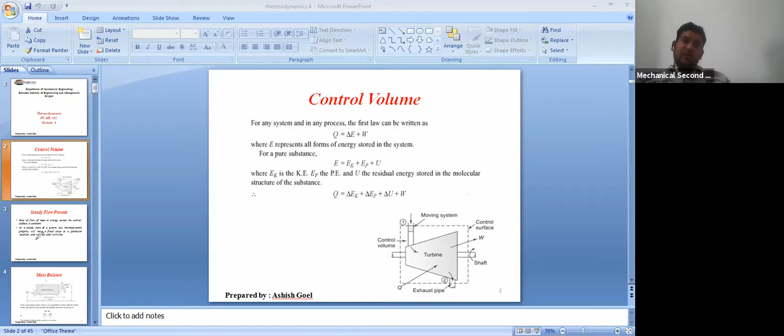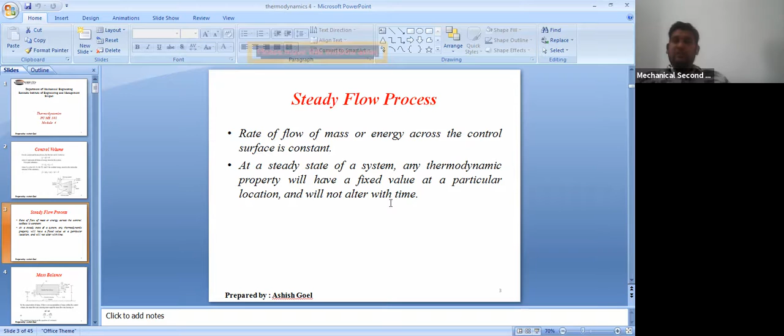But in steady flow, everything should be constant. That is, everything should be same. Input and output is same. At a steady state of a system, any thermodynamic property will have a fixed value at a particular location and will not alter with time. All the things will have a particular value.

Okay, now for a steady flow process, mass balance is compulsory. How? You can see this is, suppose, a steady flow device. All the devices that we consider for this thermodynamic study, that we use in our day-to-day life, such as nozzle, diffuser, etc., they all come under the category of steady flow device. So for example, here suppose we have a steady flow device.

Now you can see this dotted line is nothing but the control surface. This is the inlet pipe, through which a flow is coming inside the system. For example, if you take any nozzle, in a nozzle what happens? The fluid enters the nozzle with less speed, and when it goes out of the nozzle, it has high speed. It is the nature of the nozzle. It increases the speed of the fluid.

So in the similar manner, suppose we have a steady flow device, whatever the device it may be. So this one is the inlet, and this 2 is the outlet. That is, from pipe 2 the fluid is coming out of this control surface. Okay, now suppose this first pipe

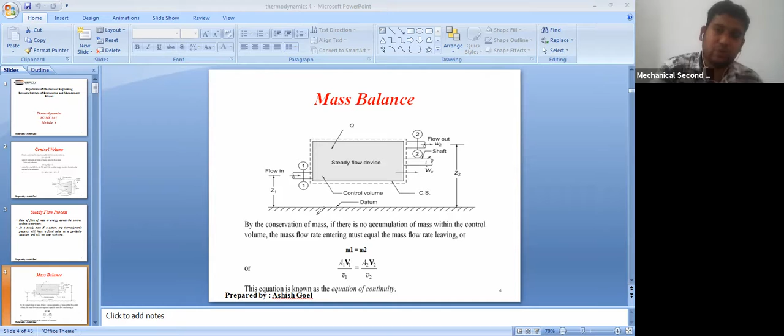So what is the continuity equation? It is nothing but the mass balance. That is, the mass inlet should be equal to the mass outlet. Small v is the specific volume, and capital V is the velocity.

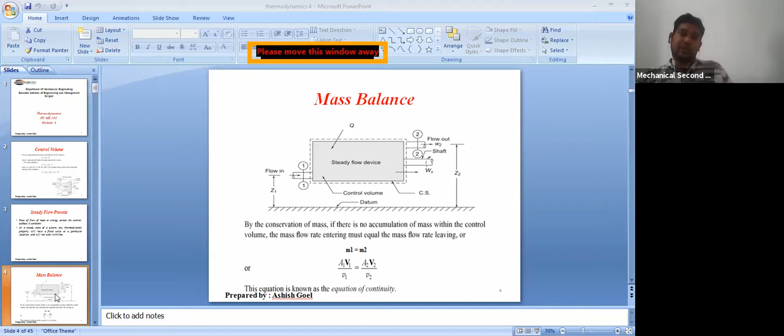So this is the continuity equation. Remember this formula: A1 V1 by v1 equal to A2 V2 by v2. Okay. Now let us discuss energy balance. Same system we have, same datum, same steady flow device. Okay, same shaft. This is the entry point, this is the exit point.

So what is the energy balance? Energy is also not accumulated inside the system; whatever energy is coming in should be equal to what is going out. In the meanwhile, you can understand that whenever a device or system is there, when some energy is coming in, some energy is going out, and it is able to perform some work, then definitely there would be heat transfer.

Because if the device is not isolated, not insulated, then definitely heat transfer can also happen, from the system to surrounding and from surrounding to system. So you can see this is Q, the amount of heat transfer taking place between system and surrounding.

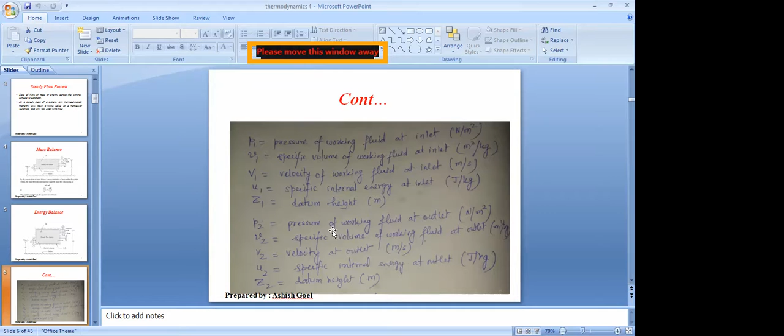v2 equal to specific volume, capital V2 equal to velocity, small u2 equal to specific internal energy, and Z2 equal to datum height. Now, if we want to apply the conservation of energy here, what should be our motto? Our motto is that we should equate all the energies associated with the working fluid at inlet and outlet.

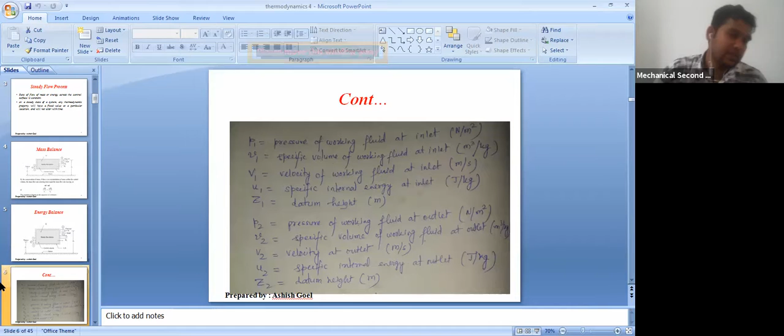Now, suppose the total energy inlet we are representing with E1 and the energy outlet we are representing with E2. E1 equal to E2. Okay, so E1 means energy inlet.

What energies can there be? It would be internal energy, flow energy, kinetic energy, potential energy, and also heat transfer at inlet. What will be at the outlet? Internal energy, flow energy, kinetic energy, potential energy and work transfer.

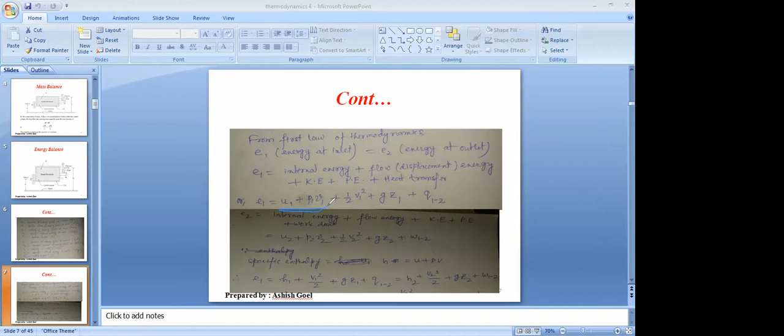So you can write E1 as H1 plus all the other things same, that is V1 square by 2 plus gZ1 plus Q12. And similarly, E2 would be what? H2 plus V2 square by 2 plus gZ2 plus W12.

Okay, and we will equate both the terms, because this is the condition of what? Energy balance. Whatever energy is at the inlet, the same should be at the outlet. So now what you will get when you do so? Then you will not get anything new, but you can see this is the equation which is known as the steady flow energy equation.

This is the steady flow energy equation, that is H1 plus V1 square by 2 plus gZ1 plus Q12 equal to H2 plus V2 square by 2 plus gZ2 plus W12. This formula will be useful for solving many problems. That means when we do energy balance in the case of steady flow, we get this equation. This formula is important, remember it.

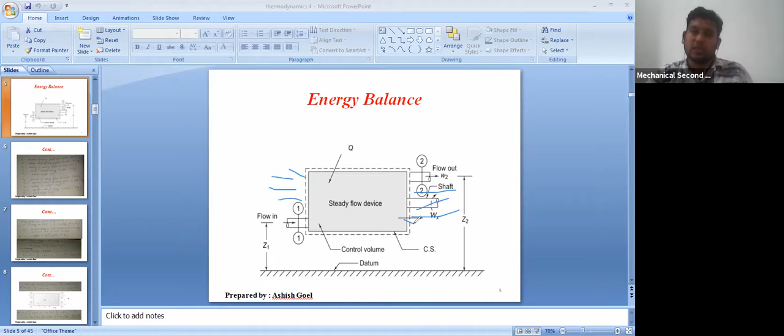You can see here, in the control volume all the things are same. Two inlets are there and two outlets are there. If we do the calculation for such a case, sum up the inlets. Here look at the first case, the equation that was there, H1 plus V1 square by 2 plus gZ1 plus Q1 equal to the same.

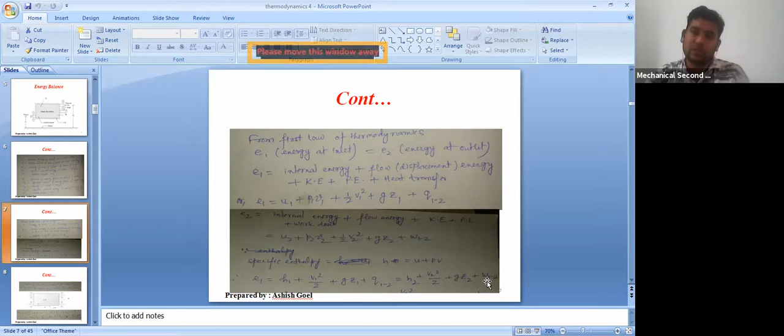If we elaborate it a bit more, we can multiply it with mass also, because whatever we have got till now is for per unit mass. And if we have a particular amount of mass which is flowing in, and if we know the value, then we can multiply this particular equation with mass also. How much mass is coming at inlet and how much going at outlet, we can multiply that too, there is no problem at all. So this equation can be further expanded in terms of mass also.

Now if you take 2 inlets and 2 outlets, 1 1 2 2 is the inlet, 3 3 4 4 is the outlet. So nothing changes, you have to do the same thing. Suppose at point 1 the mass coming in is m1, at point 2 mass coming in is m2 kg, at point 3 mass going out is m3 kg, at point 4 mass going out is m4 kg. Heat transfer is Q and work transfer is W. So here you write m1 multiplied with the first point's terms, and the rest of the terms remain the same. Only the heat we write once as plus Q, because heat is not associated with this pipe specifically.

This energy which is coming in, because heat is the total heat coming into the system from any other source. So m1 into energy at this point plus m2 into energy at this point plus total heat is equal to m3 energy at this point plus m4 energy at this point plus W also. Here W was left out by mistake, so plus W will also be there. So that is the steady flow energy equation for more than one inlet and outlet of a control volume device or a steady flow device.

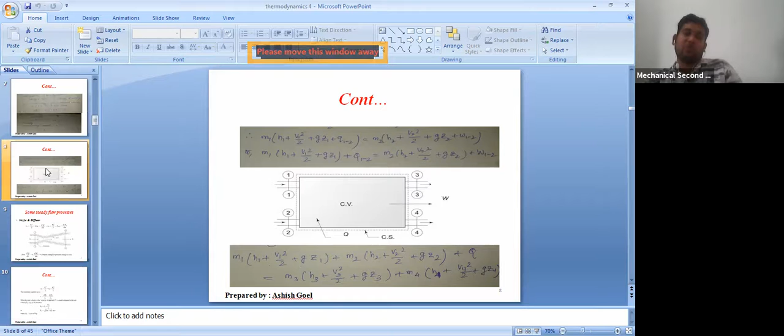There are many devices in which we can apply the steady flow energy equation. So the very first one is the nozzle and diffuser. Nozzle and diffuser are very common thermodynamic devices that are useful in many areas of thermodynamics and in our day-to-day life also. Have you seen a nozzle? Has everyone seen a nozzle? Yes sir, we have seen it, in many places like injector nozzles, in pipes also we have seen.

What is the function of a nozzle? The nozzle's function is what? It increases the velocity of the fluid at the expense of the pressure drop. That means whenever any fluid enters a nozzle, its velocity is low but pressure is high. But when it comes out of the nozzle, what happens is its speed increases a lot, but the pressure falls a lot. So at the expense of the pressure, the increase in the velocity takes place. This is the function of nozzle.

And the diffuser is just the reverse of nozzle. When you need to decrease the speed of a fluid, you use a diffuser. That means at the inlet the speed is very high, at the outlet the speed is very less. So this is the function of diffuser. In practice, the nozzles used in power plants etc. are generally insulated. The nozzle is insulated, so there is no heat transfer from outside, that is, between the system and surrounding.

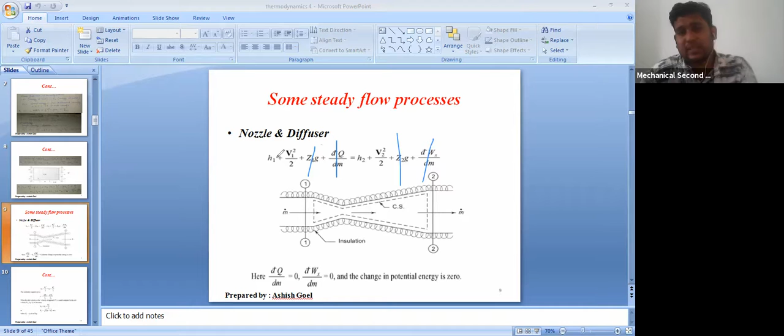What I just said, the job of nozzle is to increase velocity. So at the inlet of the nozzle, the velocity of the fluid is very less, and at the outlet of the nozzle, the velocity becomes very high. So this v1, the velocity, in comparison to the outlet is very small, because this v1 is the inlet velocity. So that is why this v1 can also be taken as 0 with respect to this v2.

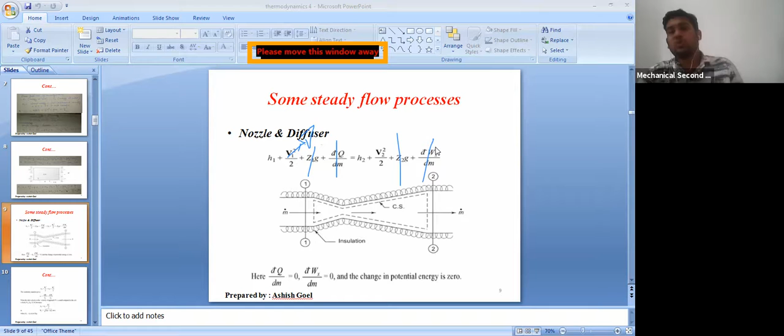Understood? So if you also take this as 0, then what final equation will remain with us, h1 equal to h2 plus v2 square by 2. Or from here we can find out v2 is equal to root of 2 into h1 minus h2 meter per second.

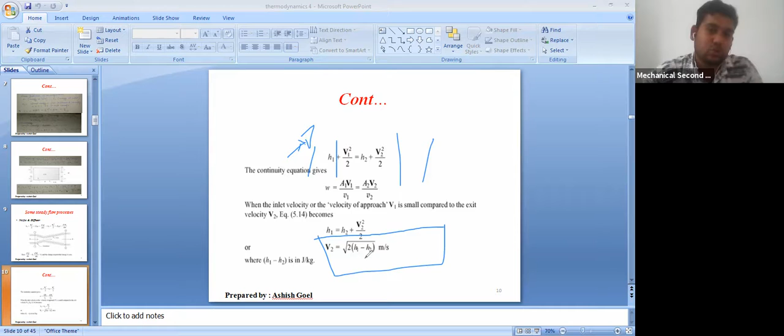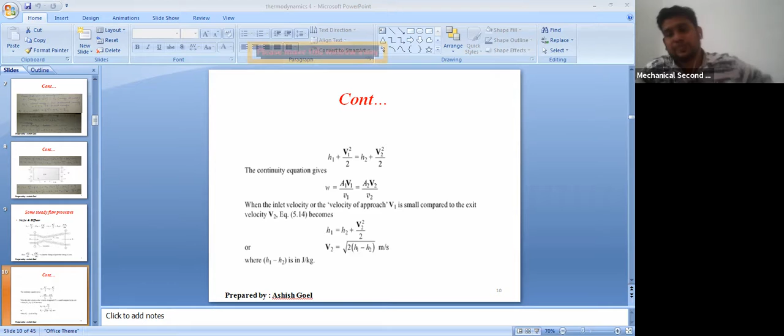This is also one of the very important equations for the nozzle. If you need to find the velocity of a nozzle, for any device, any fluid passing through the nozzle, and if you know the enthalpy at the inlet and at the outlet, you can find it out using this formula, that is root 2 into h1 minus h2 meter per second. This is the very important equation for the nozzle. Understood by everyone? Yes sir. Okay, so this is the condition of nozzle.

Now there is another device which is known as throttling device. This throttling device is used in many places, in refrigerators also throttling device is used. Now what is the job of a throttling device? Throttling process is used in throttling device. What happens here is that this fluid comes inside the system, and here there is a valve, so through a very small passage our fluid passes, and this is also an insulated device, this is also insulated.

That means what? The device does not transfer the heat from system to surrounding, and this throttling device also does not produce any kind of work. So for throttling device also we can write dq = 0 and dw = 0. So if you just use this particular equation, h1 plus v1 square by 2 equals h2 plus v2 square

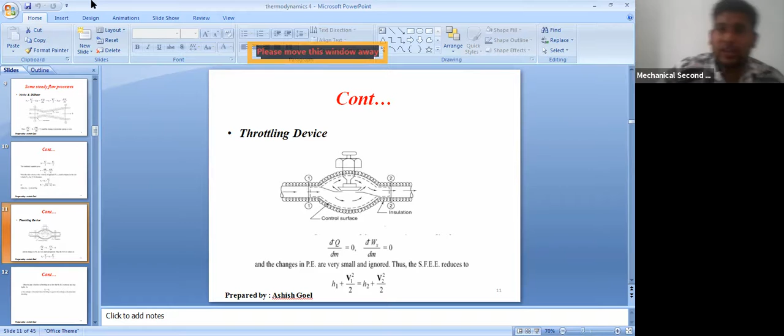So if it is equal, then can we write v1 is equal to v2? If we put v1 equal to v2 in this equation, then v1 square by 2 and v2 square by 2, they both will cancel each other. Am I correct? Sir, in throttling device, outlet and inlet velocity will always remain the same? Throughout the device, it almost remains same.

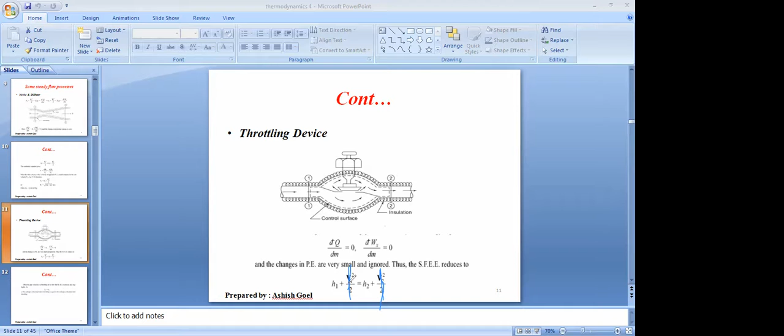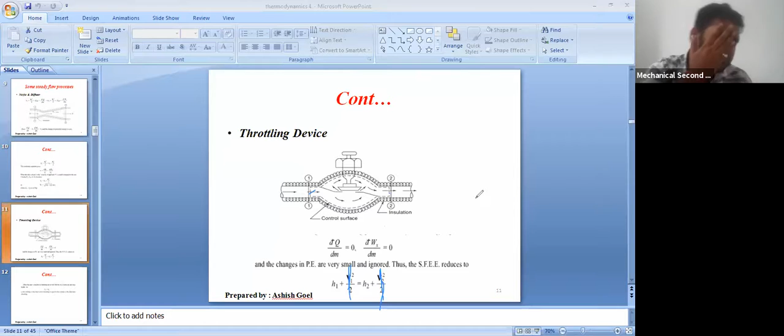h1 equal to h2. Sir, enthalpy. That is h1 equal to h2. Yes, sir. So what does this mean? If h1 equal to h2, that means enthalpy remains constant. The enthalpy at the inlet is the same at the outlet. Yes or no? Yes, sir. So in throttling device, enthalpy remains constant. In throttling process, enthalpy remains constant. Throttling is an isenthalpic process.

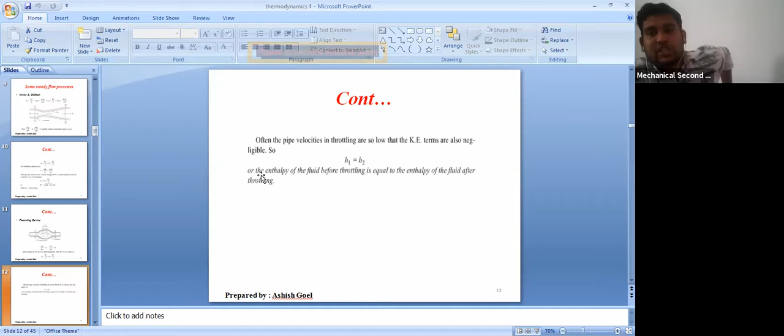We will do the steady flow energy equation application on these devices in our next class. Now please, if you have any questions regarding today's class, please ask me.